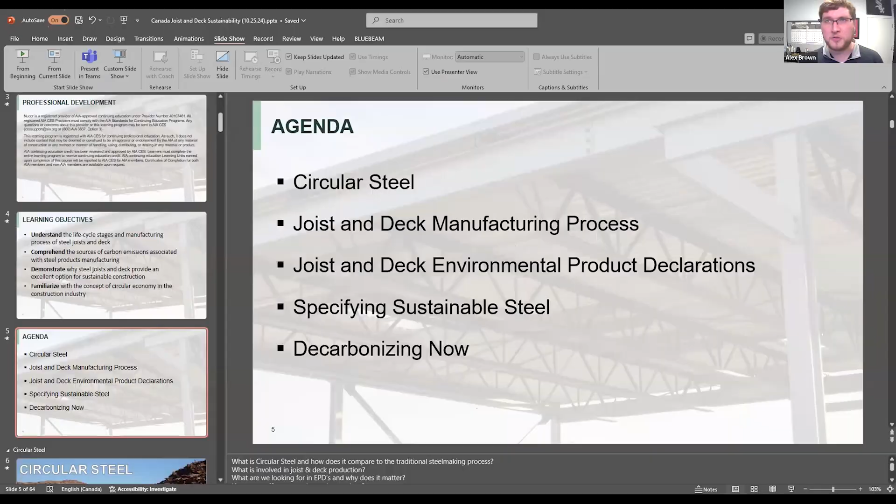Yeah, thank you so much. So myself and Alex, we are both from Vulcraft. I am Sherard Gosine, I'm the district sales manager for Vulcraft Canada, and I'm located in Calgary. I'm also Vulcraft Canada West's product champion for sustainability for our Western division.

Yep, and I'm Alex Brown. I'm actually stateside, I live in the Chicago area, so at the risk of being told to leave, go Blackhawks.

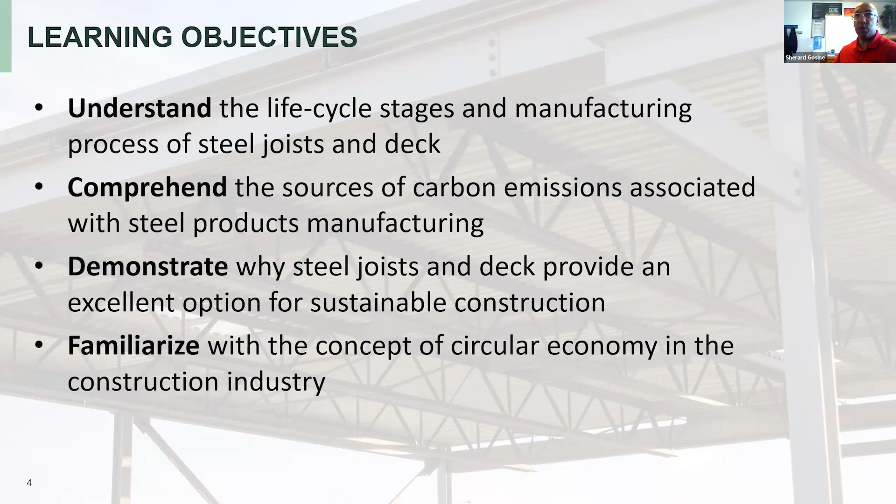Great, thank you Alex, so let's dive right in. Today we want to understand the life cycle and stages regarding joist and deck, comprehend the sources of carbon emissions associated with that, demonstrate why steel joists and deck provide an excellent option for your sustainability needs, and be familiar with the concept of a circular economy in regards to construction.

So with circular steel, that's what we'll cover first, followed by an overview of the joist and deck manufacturing process, then our EPDs, or environmental product declarations, how you can specify sustainable steel, and then also decarbonizing now for your project needs.

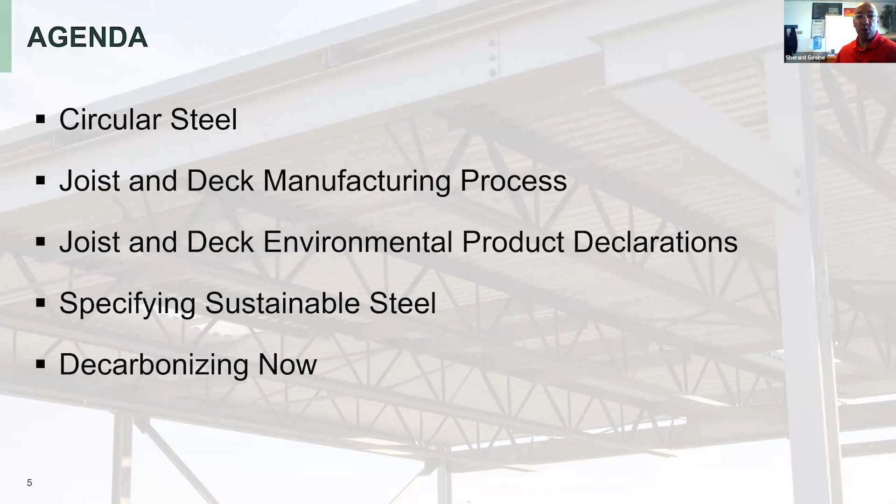So circular steel, what is it? Well, involved in circular steel, what we're specifically talking about is your carbon. So operational carbon examples are something like the electricity used to turn on your lights, natural gas for your heaters, water usage, and the carbon emitting ways those utilities are generated. Operational carbon is just a piece of the overall carbon pie.

But in order to try and bring down that carbon footprint, it's been expanded to include everything from cradle to grave, basically. Some examples of embodied carbon would be the emissions from the mining of raw materials, electricity used to run the machines to process them. So that's that entire pie I was talking about. And measuring operational carbon in LEED calculations is a good start, but we can do better, which is why there's an expansion to include embodied carbon as well as operational carbon.

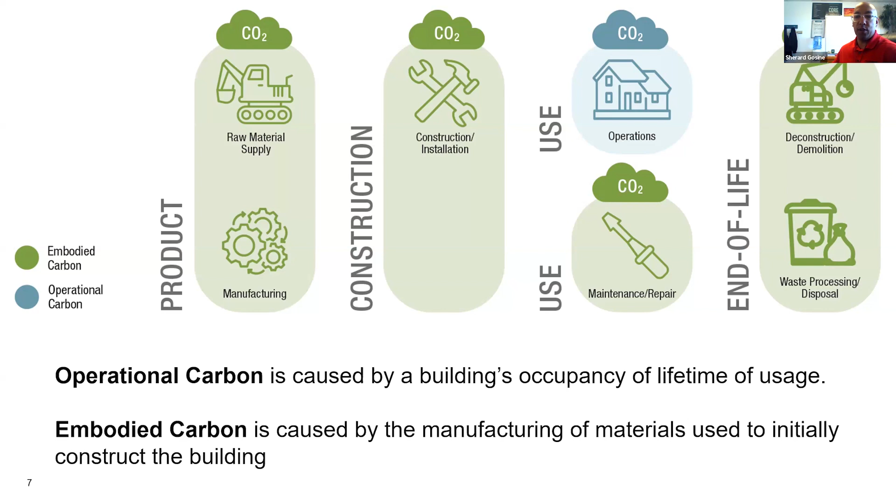So greenhouse gas emissions - the majority of greenhouse gas emissions stem from the steelmaking process, like 90 to 92% of greenhouse gas emissions comes from that first step.

Where steel comes from really matters. The predominant production method internationally is the use of blast furnace or basic oxygen furnace, which is kind of your quote unquote old school method of creating steel. However, when you come stateside, the construction products sourced from US manufacturers are more environmentally friendly than those sourced offshore.

The construction industry generates an estimated 39% of the world's carbon emissions, according to the World Green Building Council. North America has the most advanced green building market, with commercial and government sectors alike continuing to drive the uptake of sustainable building best practices.

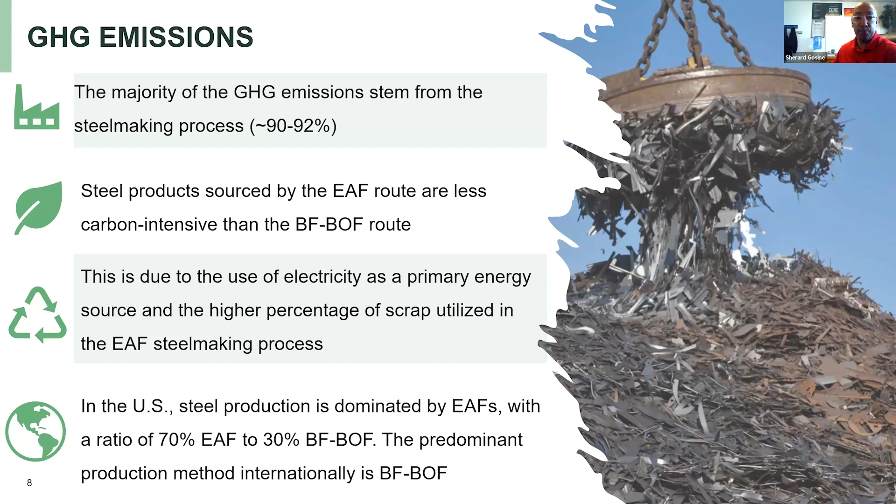So what are the two processes used for steelmaking? One is extractive, the other is circular. When looking at extractive steelmaking, it's really the mining and the blast furnace technology that are really carbon intensive. When you compare that to the circular steelmaking process, it can and does use the end of life steel from the extractive process, thereby reducing the embodied carbon content.

In the circular steelmaking process, you'll take your end of life steel, it gets processed, it gets melted down in an electric arc furnace, and then gets used. Once that project or use is done, the cycle starts all over again, so you're not digging up any new material, new iron ore for your steel. The great thing about steel, if you didn't already know, is it can be recycled and reused infinitely without a loss of mechanical properties.

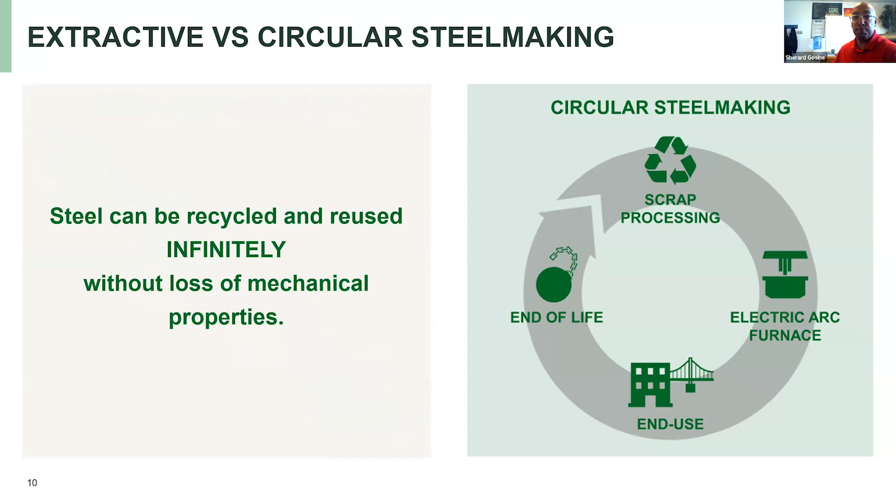So comparing the steel making process between blast furnace and electric arc furnace, much of the greenhouse gas emissions associated with steel stem from the production of liquid steel. Two main types of technology are used: the integrated mill and the scrap-based mini mill. In an integrated mill, liquid steel is produced through an integrated blast furnace and a basic oxygen furnace. The main source of CO2 emissions there stems from iron production, which involves burning iron ore and coking coal.

A second method to produce liquid steel is through electric arc furnaces, otherwise known as mini mills. Mini mills use steel scrap for the most part. In that EAF steel making process, most of the CO2 emissions are associated with electricity usage, whether that comes from hydro, coal, nuclear, or whatever source.

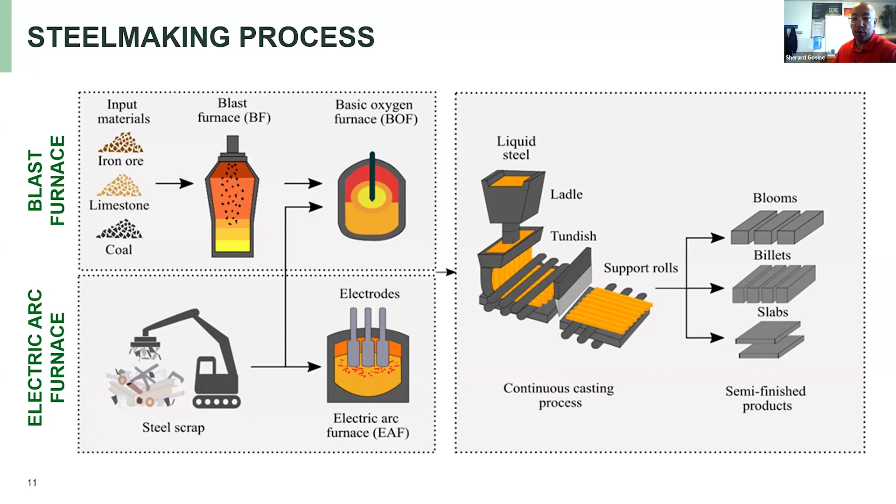Once that liquid steel is produced by the blast furnace, oxygen furnace, or electric arc furnace, the process of forming the steel products is essentially the same. The liquid steel is poured into a ladle, stirred, then poured into a caster to achieve the desired semi-finished shape. After that, steel is cooled, reheated, and shaped into various products at the rolling mill. For joists, mainly long products are used, and for steel deck, coils are used.

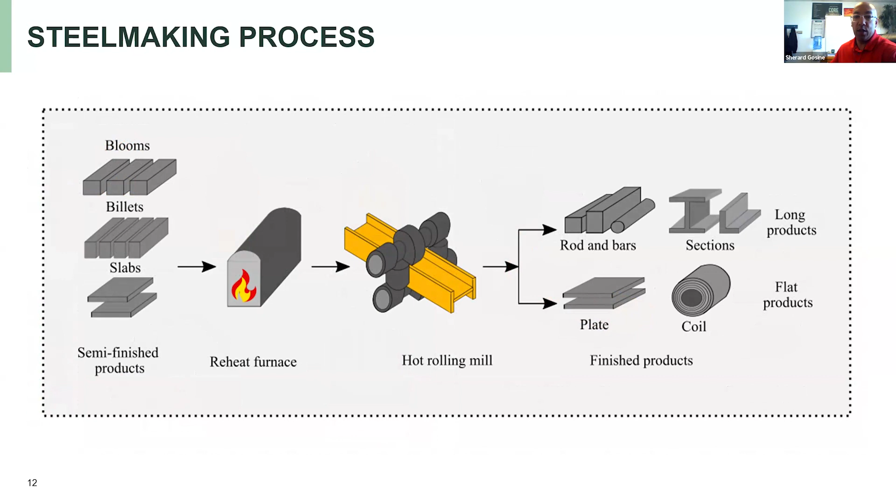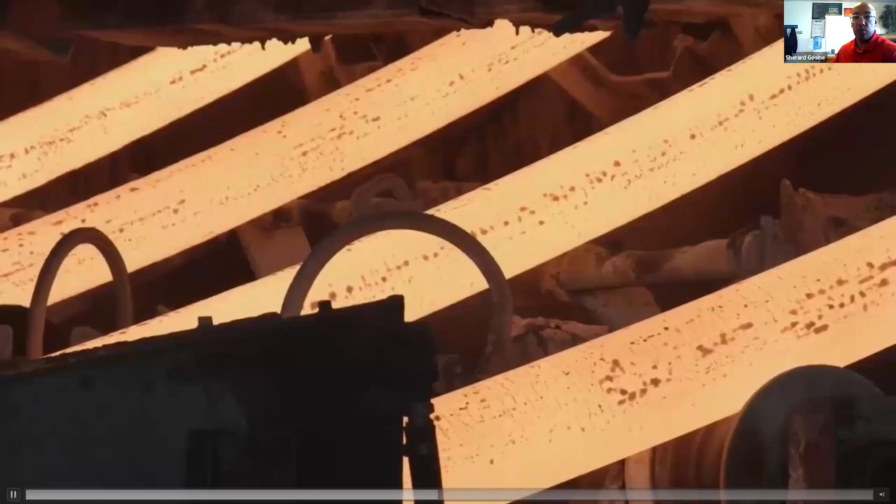Once sorted, our cranes drop the scrap into our EAF furnaces, which are the driving force behind our steelmaking process. The EAF uses electricity to melt the scrap down to 3,000 degree Fahrenheit molten steel. This process is significantly more energy efficient than traditional steel furnaces. These strands, usually called billets, slabs, or blooms, are trimmed in preparation for rolling. To reduce a steel slab into a final product requires pressure, a lot of it. Once finished, our steel products are packaged and shipped via barge, rail, and truck to customers across North America.

So what are we looking at in terms of recycled content? When it comes to joists, the recycled content in that electric arc furnace technology is about 97%, so really high. Deck is a little bit less at 60%. Our products across the board for joist and deck average about 77% recycled content.

Just something to note, the blast furnace technology does produce slightly cleaner steel for coils, which affects its usage for light gauge applications such as the automotive industry. So industries like that would lean towards blast furnace technology.

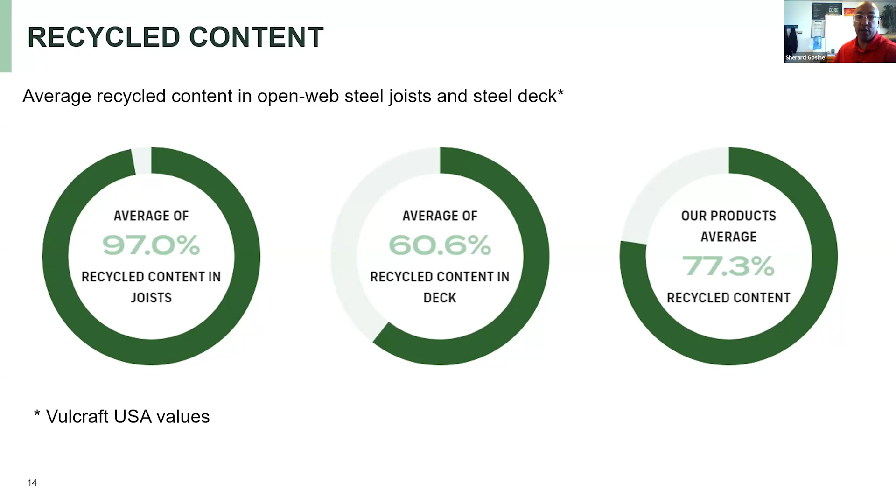At this point, I'll flip it over to Alex, and he'll run over the manufacturing portion. Before getting into this, there was a comment made by Forrest, and thank you, you're spot on, that North American steel, you can't generalize to say it's better or worse than anywhere else internationally. It really comes down to whether it's a blast furnace or an electric arc furnace operation. It happens that in North America, most major manufacturers are using electric arc furnaces, but that's not a given. In the back half of this presentation, when we get into the environmental product declarations, that's going to come into play on how you can tell where that steel is coming from and what that means.

Let me switch to my screen here, which should be the exact same slide you were seeing before. But then this one's different.

So once that raw steel is made, whether it's a coil, as we saw in the video, or an angle or round or bar, on the Vulcraft side, we're going to take those materials and turn it into joist and decking.

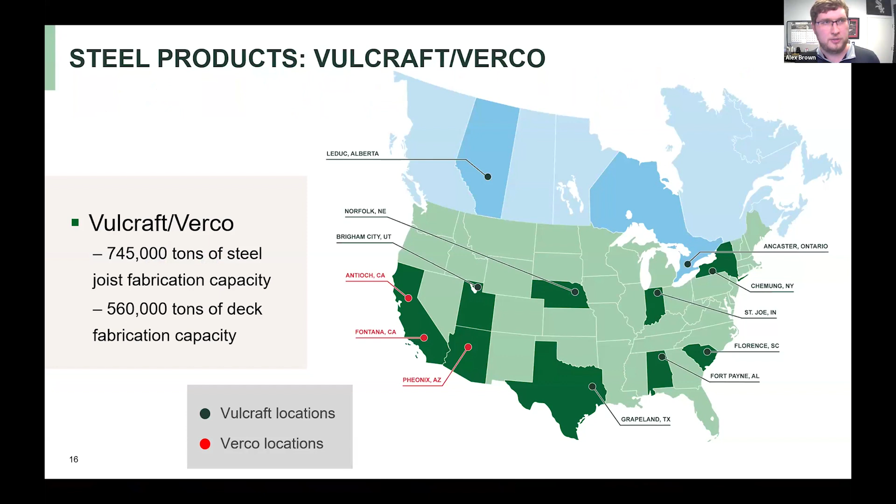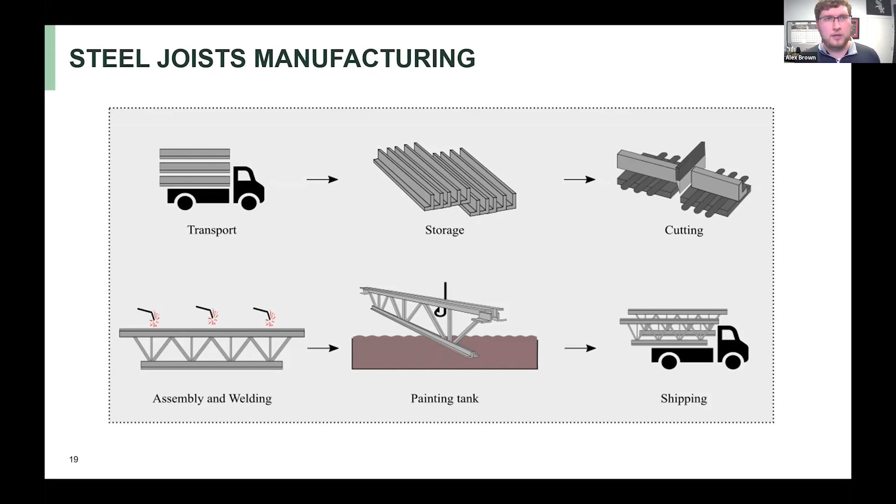And it follows its own process as well: transporting the raw materials, accepting them on site, storing them, cutting everything, doing the prep work, then doing that assembly and welding, dipping it into a primer, and shipping it to the job site ultimately. So we'll go through all of those here in a little more detail.

So you can see some of that storage here, just from an engineering perspective. To make any kind of a truss shape, we're able to control each individual member size, so we can optimize that to make it the lowest weight possible as an efficient design. We've got to stock a lot of different material sizes in order to have that flexibility, so you can see all of that stored here, just stacks and stacks of angle.

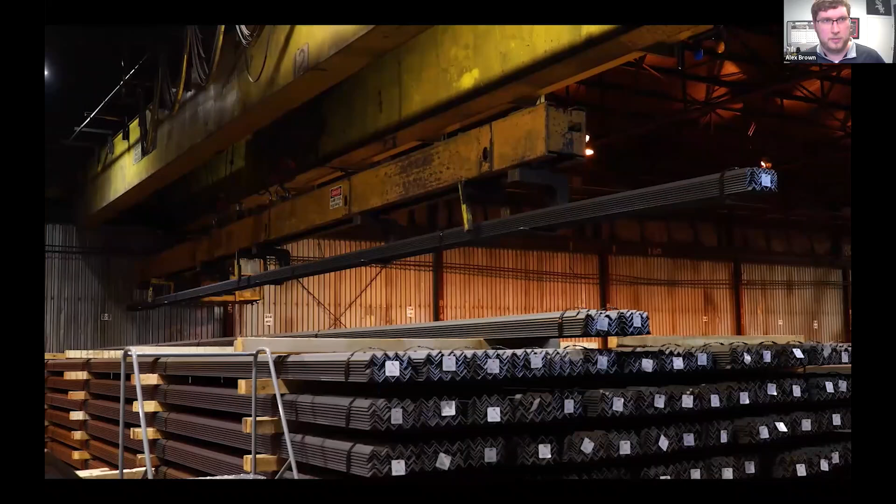This particular video was taken at our Nebraska facility in America. It doesn't look exactly the same, but it's the same procedure of handling that material, moving it, prepping it, staging it.

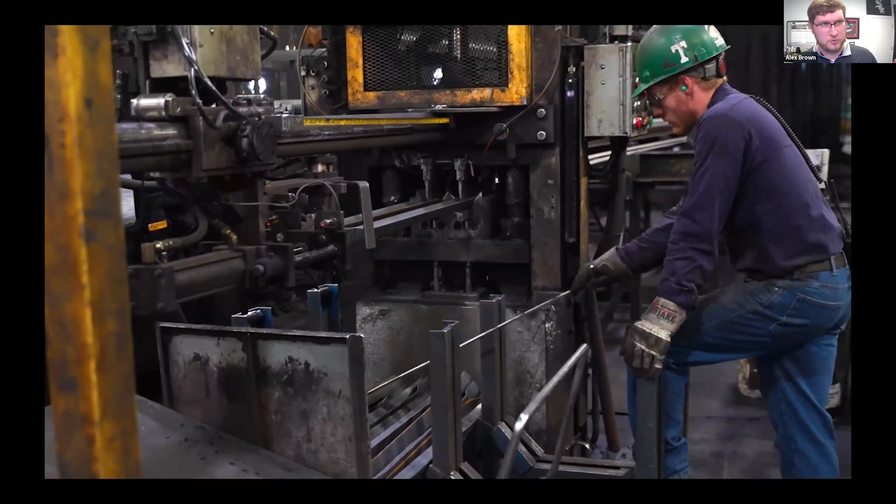You can see they're dropping the angle into place. The first guy here is splicing two angles together to get what we call a chord, so the top or bottom members of the joist. Then those are the webs, cut to length, crimped so they'll fit inside of the chords, and everything is staged ahead of time for our rigging crew.

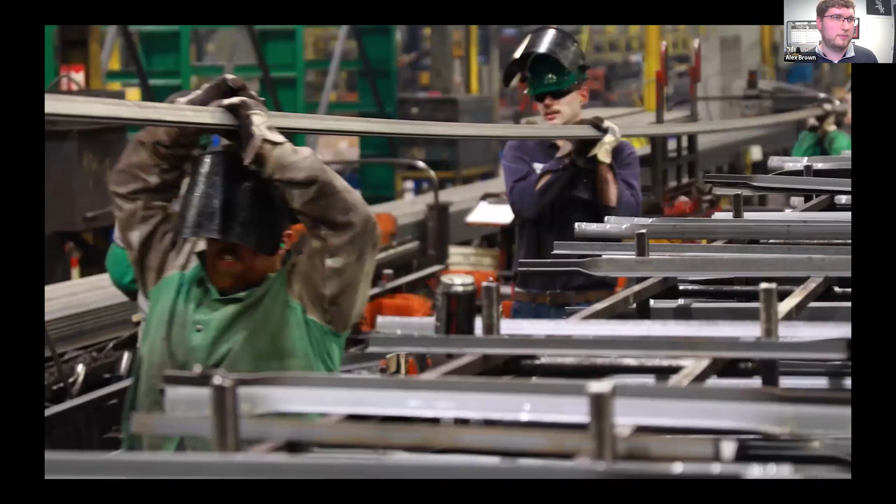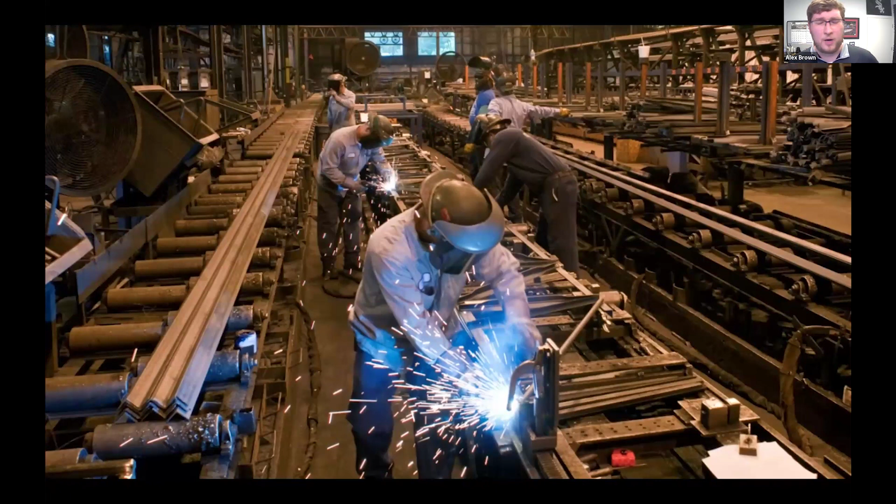You can see him preparing everything, pulling everything into place. Then everything gets tack welded together and clamped together at this part of the procedure.

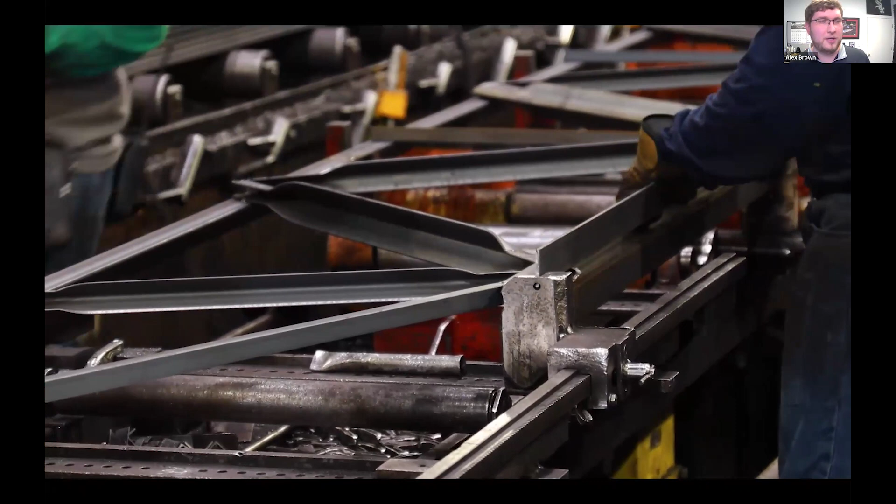Because everything's cut to length, they can just fit it in, and they know where the ends of those webs need to be, since it's got to fit up correctly. Some of our facilities have lasers that shoot down from the ceiling to help with placement. Here he's putting in one of the chord angles, and they're clamping the two of them together.

This process is always really cool to me. Granted, I'm biased because I've gotten to live and breathe this stuff for a long time, but it's just so neat to see all these separate pieces fly together, and in 30 seconds you've got an assembled joist rolling down the line.

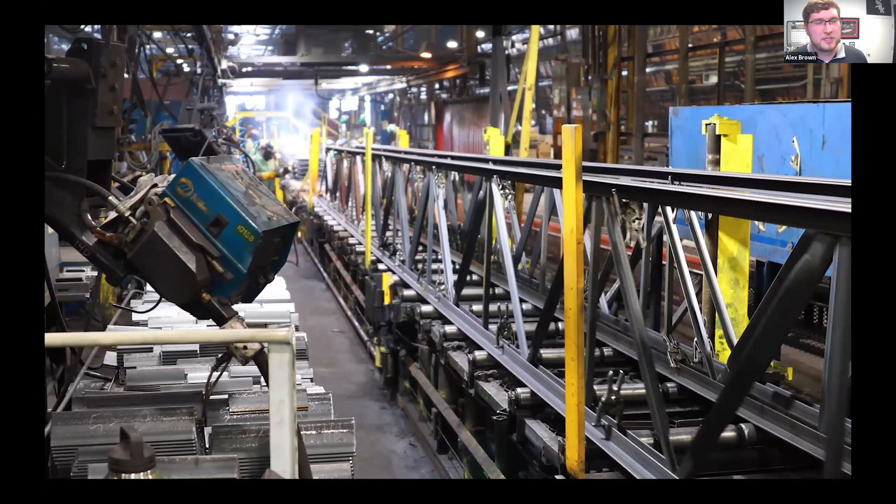In the distance there, that's our welding pit. All of these joists are kind of loosely assembled. They're really not capable of any structural performance, but the weld is what's going to pull it all together so that you get that truss action.

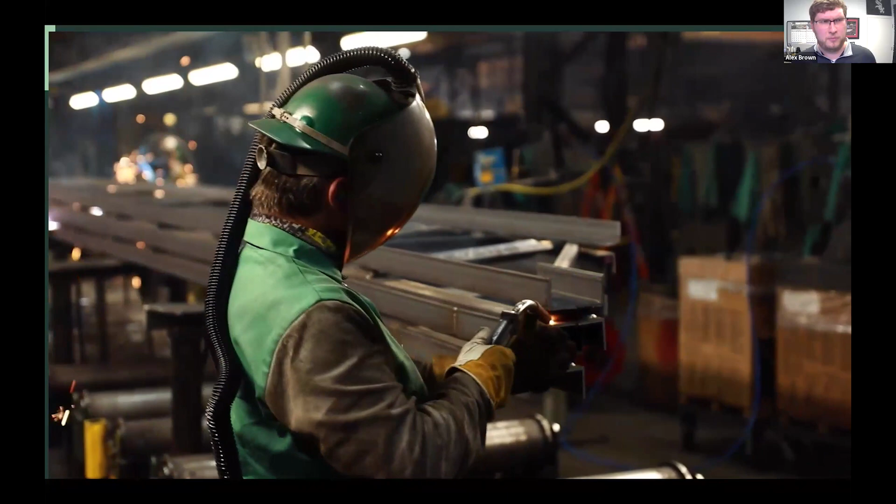You notice there's a couple of them stacked up in this shot. I think some of the other shots have three of them on their sides. That's because we get that repetition of putting so long of a weld at such a thickness, one after the other.

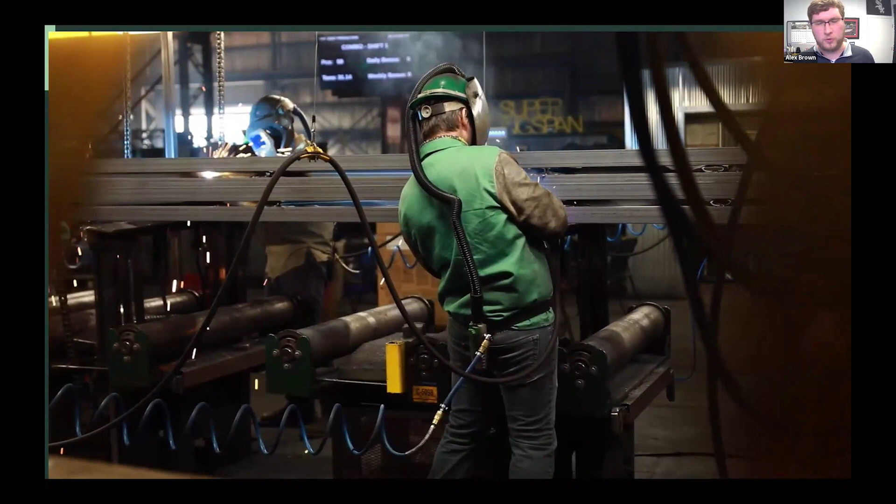So you can see here, they're flipping the joist over so that none of our welds are upward or overhead. Everything is pointed down so we can apply it easier and get a more consistent welding performance.

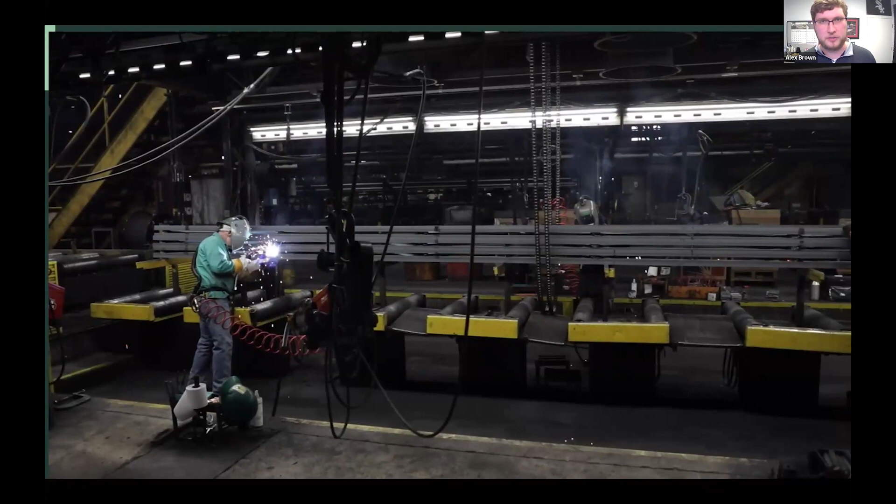Every joist we manufacture has a specific location on a specific project. It's not like we build stock joists in 50-foot lengths that you cut down to what you need. Because of all the intricacies of building a truss and having all that load transfer the way we intend it to, we build them all custom length, custom loading depth for the specific job conditions.

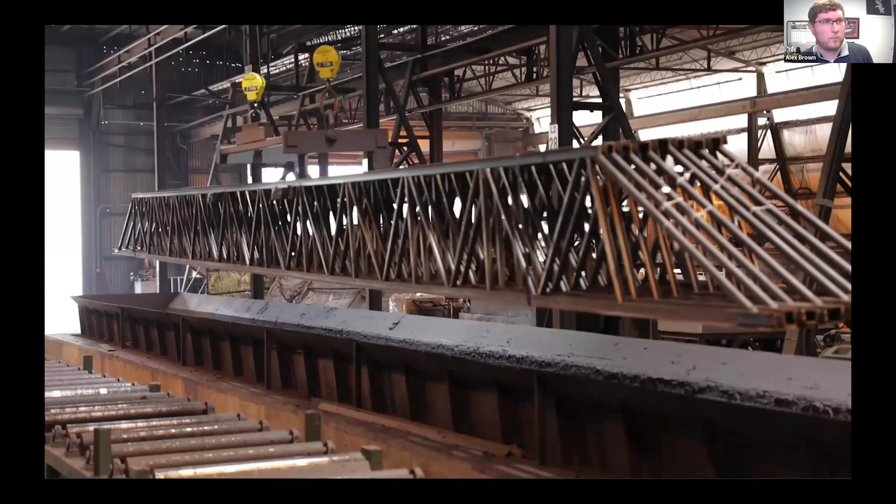Then after everything's put together, we'll dip it in gray primer. Gray is the only color we offer—kind of the old Ford Model T attitude, you can have any color you want as long as it's black. But it's just a primer, compatible with most finish paints, and intended to minimize whatever rusting may want to occur on that bare steel. It's not going to prevent it completely.

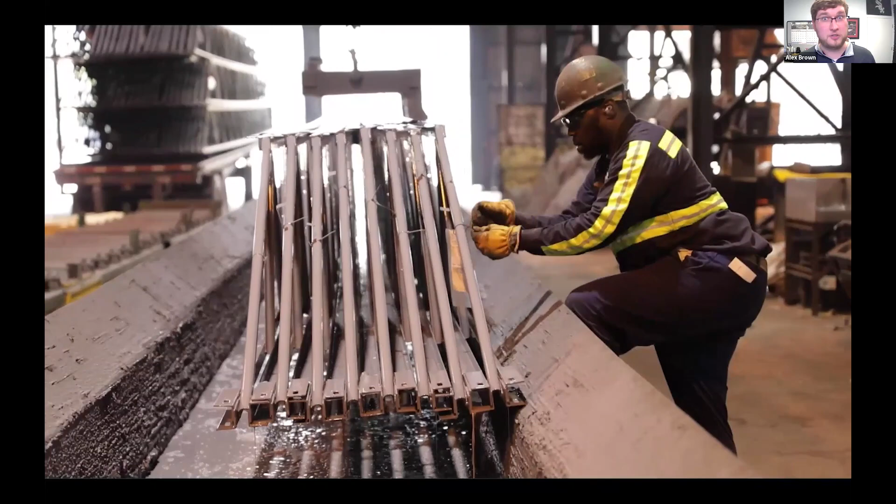Up north, I hear you get snow. I certainly do here in Chicago, and I've seen joists just get buried under a pile of snow for the whole winter. So it's not going to hold up to that kind of an ask. But just going down the truck, getting to the site, making sure it's properly covered, it should hold up pretty well there. You can see some bullet points laying it out.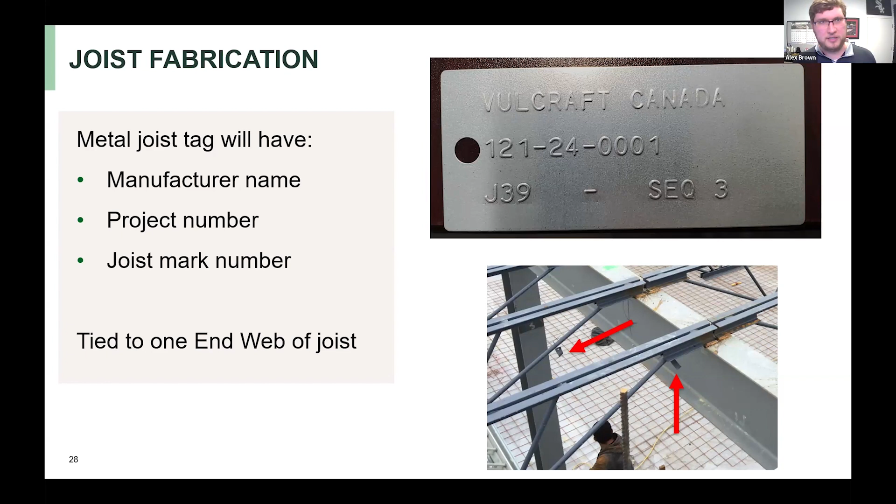So after all of that's done, after the paint dries a little bit, we'll load it up onto our trucks and maneuver them around the yard. We've got really good loading crews to manage this because it can be quite a bit when we're busy, maintaining all of these joists and all of the deck, making sure we know what belongs to what job so we can load the trucks when the job requires delivery.

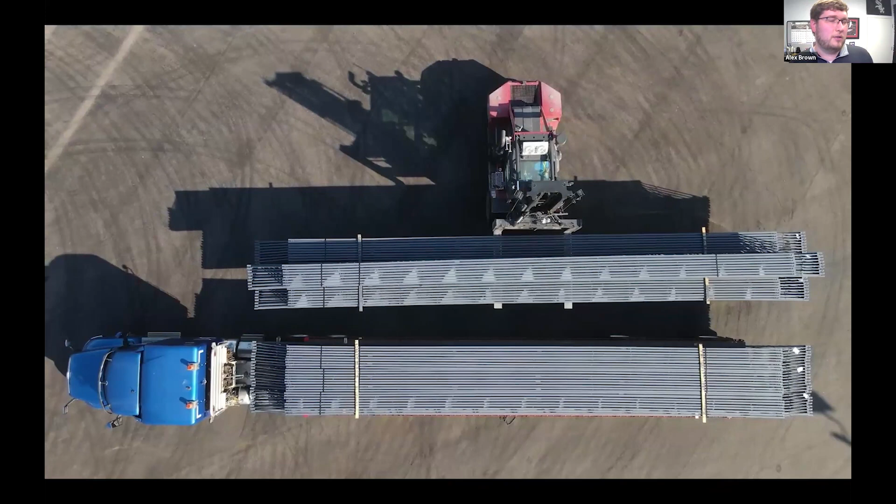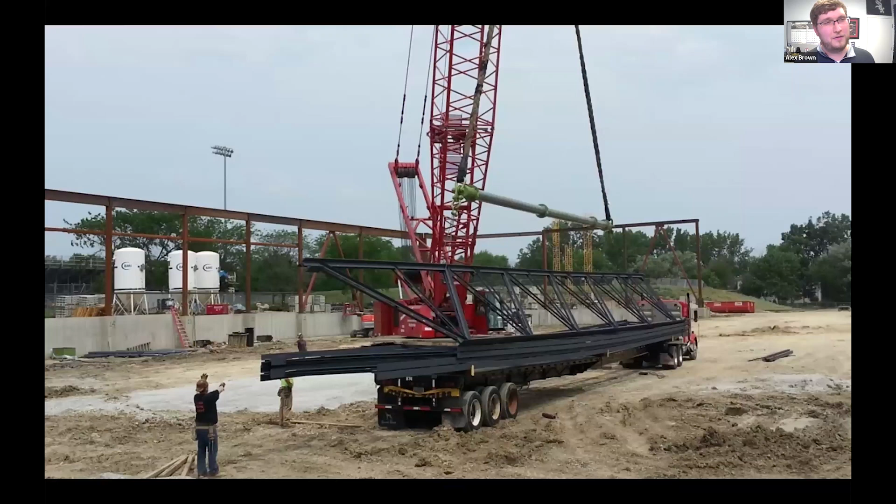So then everything gets secured on the truck. It's strapped down and then sent out to wherever the project location is, at which point the erector is going to take over and unload that truck, stage it on the ground, and prepare to fly it up into the air to place it where it belongs.

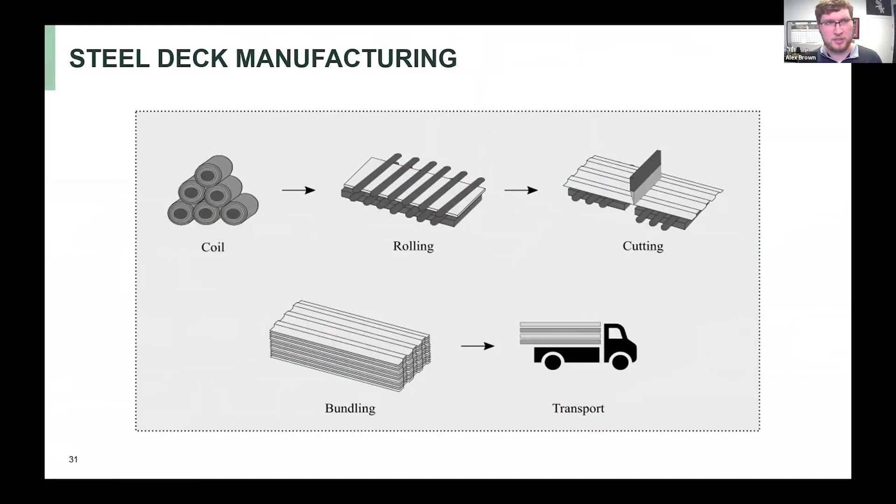On the deck side, it follows a similar structure where you've got your raw material, you have to prep it, you've got to cut it, and then in this case, stack all of those sheets, bundle them, and then again transport it to the site.

So those come with coils, and you can see a lot of coils here. Again, for the different types of deck that we can supply, the different gauge thicknesses that can happen - 20 gauge, 22, 18, 16 - all of that requires separate coils at different widths, different finishes, to make sure we can accommodate everything that we offer.

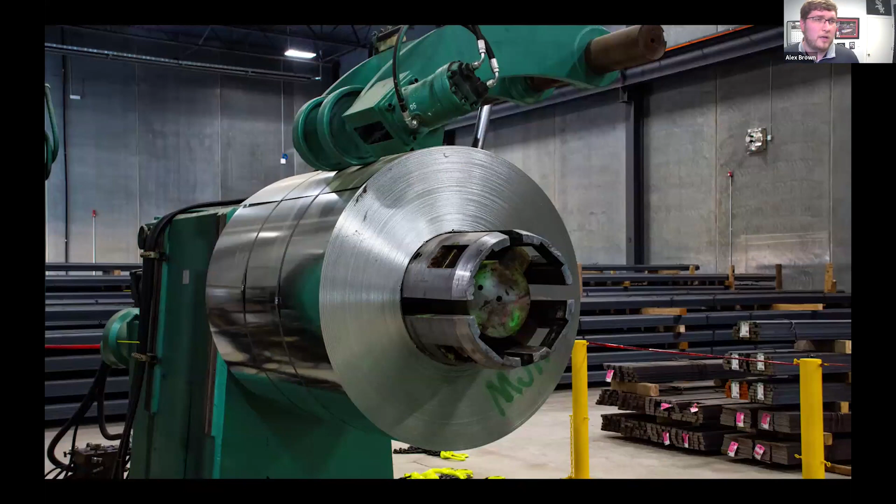And then that first step in the process is taking that coil, putting it onto that arm so that we can unspool it and feed it into our system.

So you can see here just the variety and the quantity of coils that we have just to keep our operation going. Each one of those coils is generally about 20 tons, 40,000 pounds worth of material.

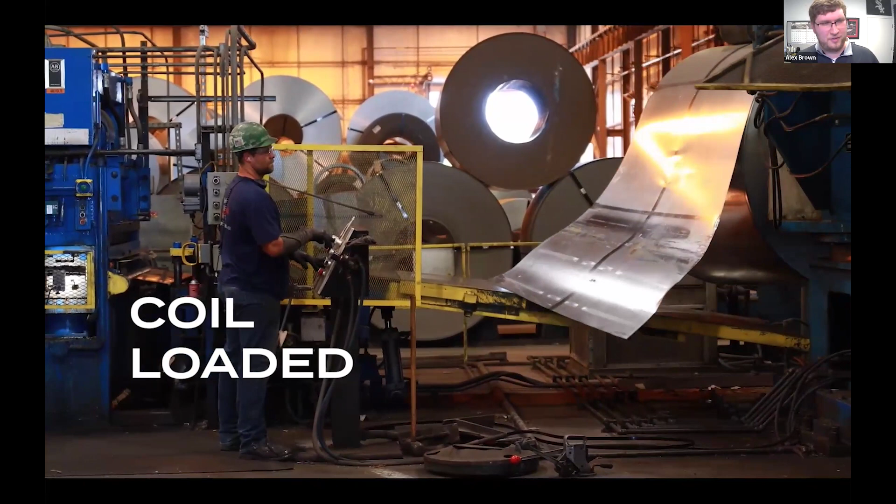So you can see it loaded onto the arm and then having that loose sheet ready so that we can attach it to the previous sheet and feed it into our machine.

Some of our Vulcraft facilities will have inline painting. Our Leduc facility doesn't do this. If painted deck is required, they're able to get it from one of our other facilities and have it shipped over.

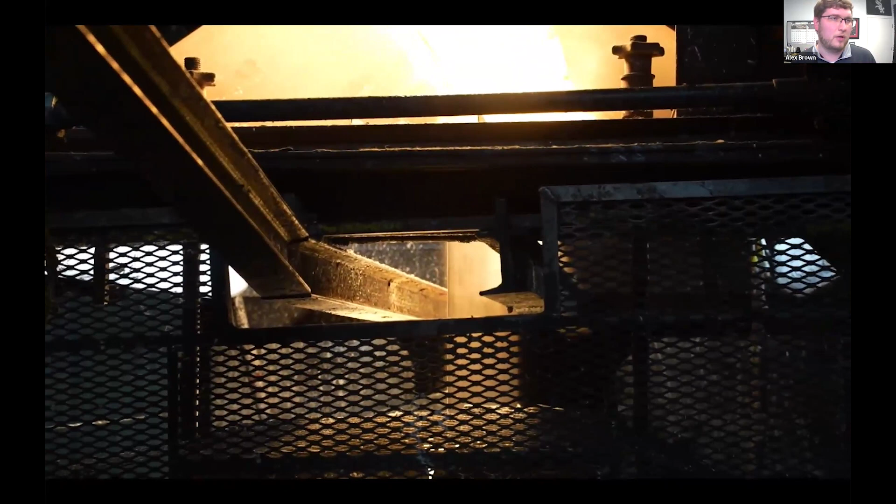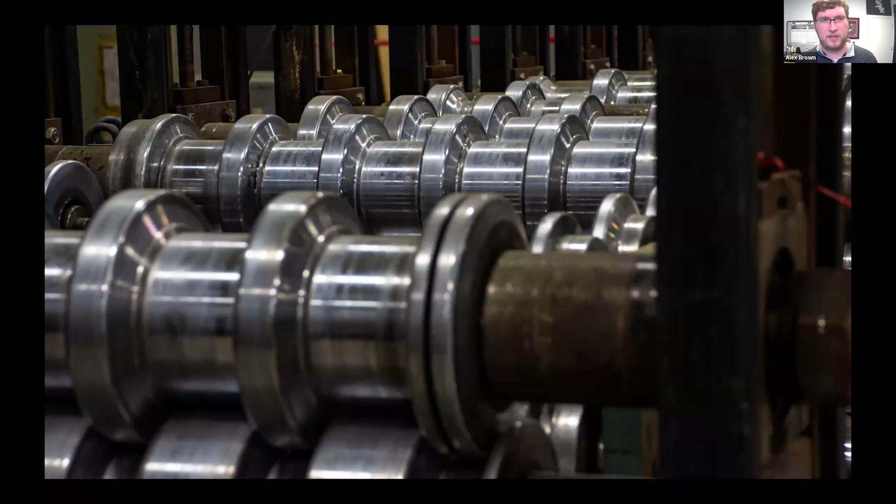And then after it's prepped, sometimes we'll do different chemical treatments or whatever is needed for the finish that's required on that project. Then it gets fed into our rollers. So this is physically taking that flat sheet and starting to bend it and move it to the corrugated shape that's needed for that structural deck profile.

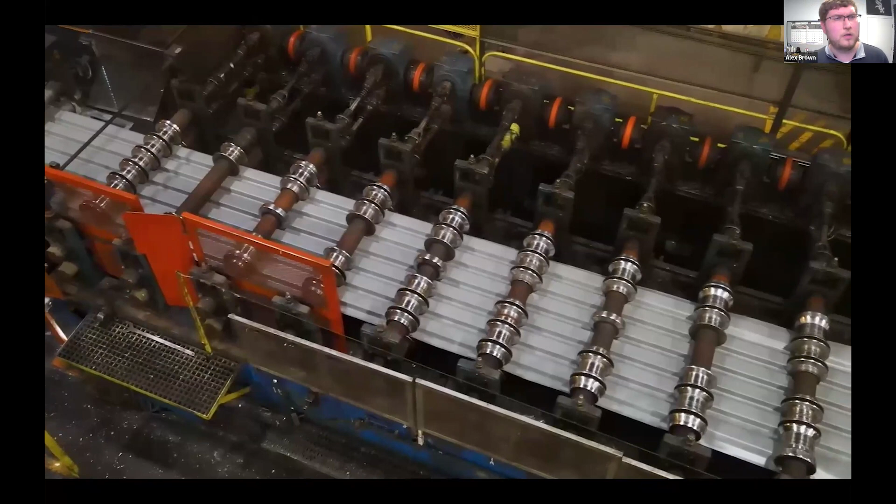So you can see here it being put through those rollers. Different embossments are put in depending on what's required.

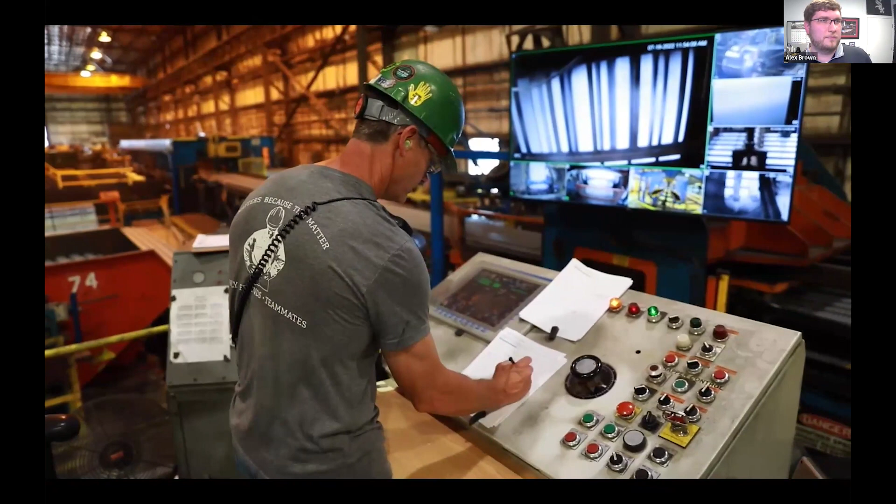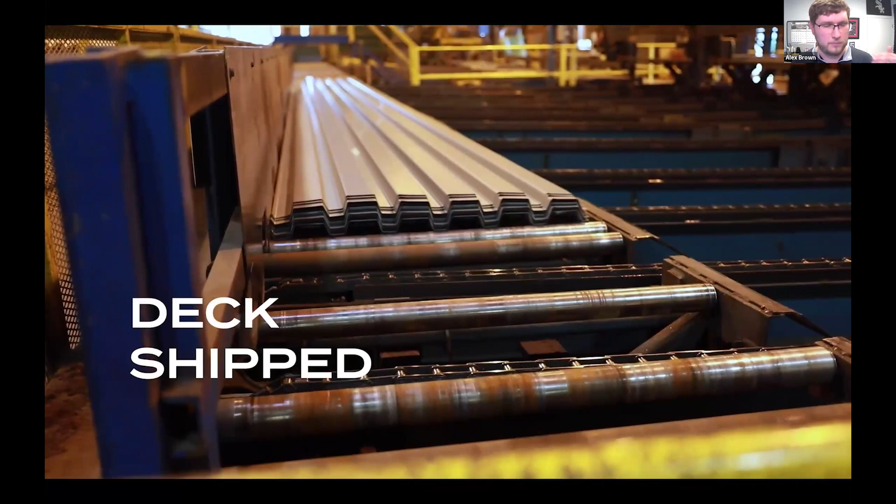And then right here, that's the shear, so that's actually cutting the deck to length. One thing you may notice is there's a lot fewer people on our deck line compared to our joist line. That's just what we found over time - the deck process can be mostly automated because it's really just cranking out that same product at whatever length is needed. Where on the joist side, there's so much variation from one joist to another potentially that we need those human beings to place everything.

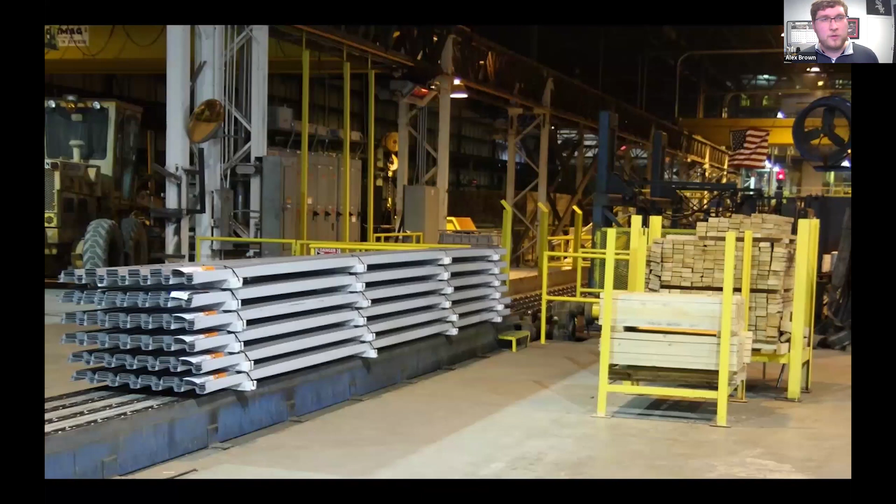And then as the deck comes out, it's going to get stacked, bundled and stored, as you can kind of see here, and you saw a little bit at the end of the video. At which point, similar to joist, it would be put on a truck and sent out.

So with all of this, we spent a fair amount of time talking about what the process is. And I'll hand it back to Sherard for how to measure all of the carbon that occurs throughout everything you saw the last 15 minutes.

I just got to jump to that EPD slide. Bear with me. Yeah, we're used to Teams here in Vulcraft, so we had to remind ourselves how to work Zoom this morning as we prepared for this.

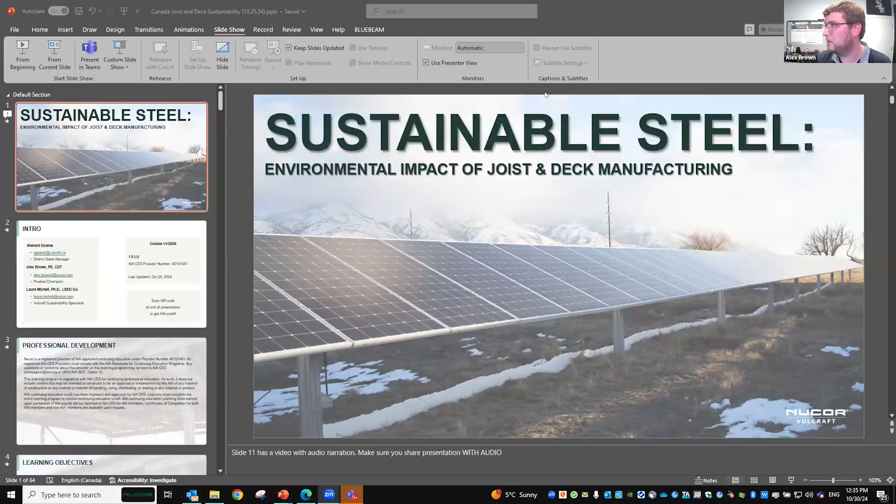It looks like it was asking me to choose to view your screen, Gerard, like it was side-by-side options and things like that, so I'll stop sharing. There we go, there we go, thank you. Perfect.

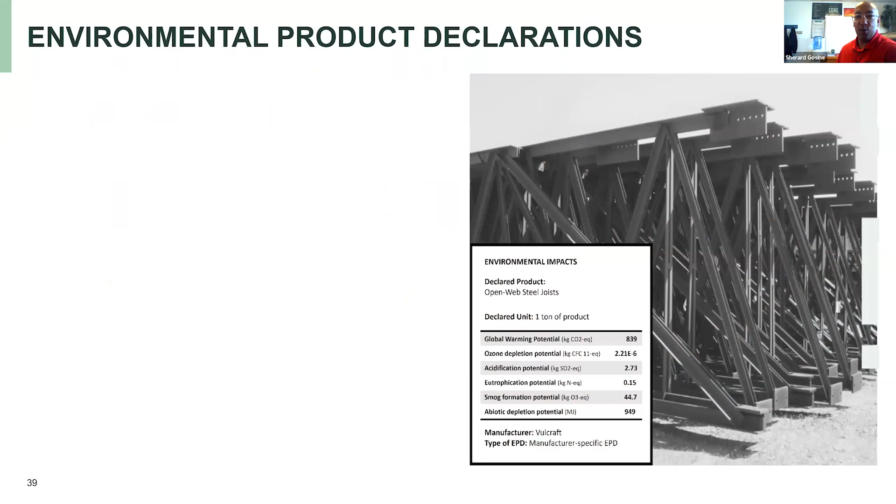Okay, so the good stuff, the environmental product declarations for joist and deck. So an EPD, what is it? Environmental product declaration - these are basically the nutrition labels that summarize the environmental impact of a specific material or product.

Vertically integrated joist and deck companies are excellent at managing their supply of sustainable steel, and we see this through the life cycle assessment in a project.

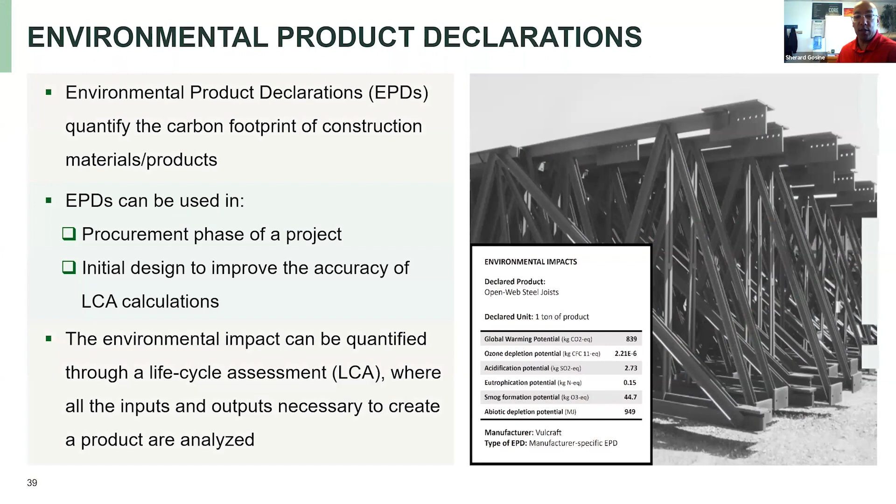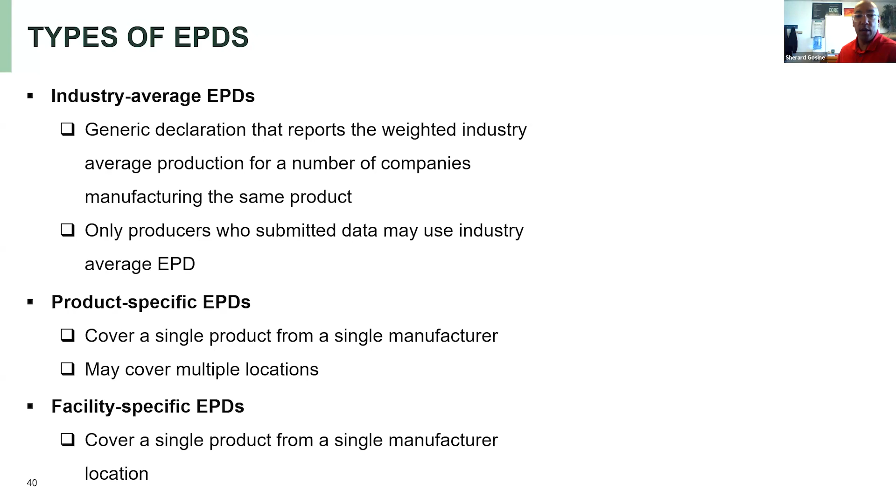So there are three types of EPDs. One is industry average, which is more or less a starting point. It's nice to have, but it can be funneled down when you go to something like a product specific EPD, which is better than an industry average. We can get even better results when we look at a facility specific EPD. So those are the most accurate numbers you can use to calculate the embodied carbon in your steel joist and deck.

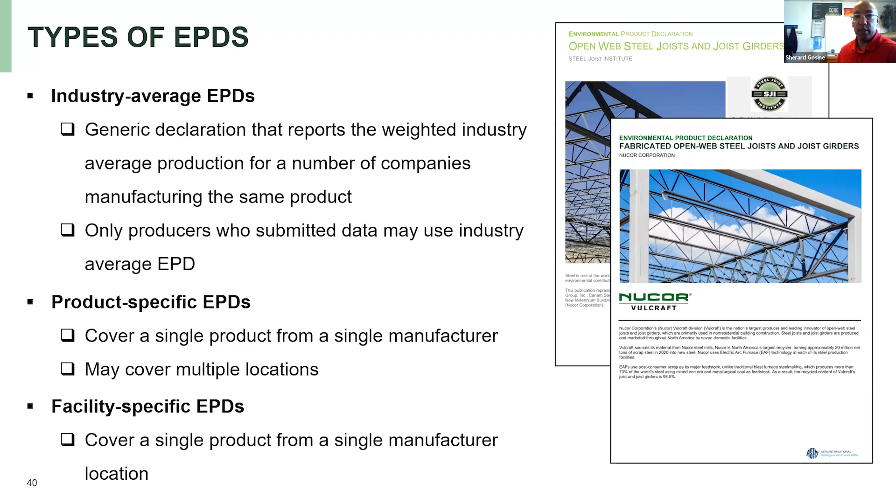So those are the covers that we have for our joist and deck EPDs. We do have links at the end where you can access this information.

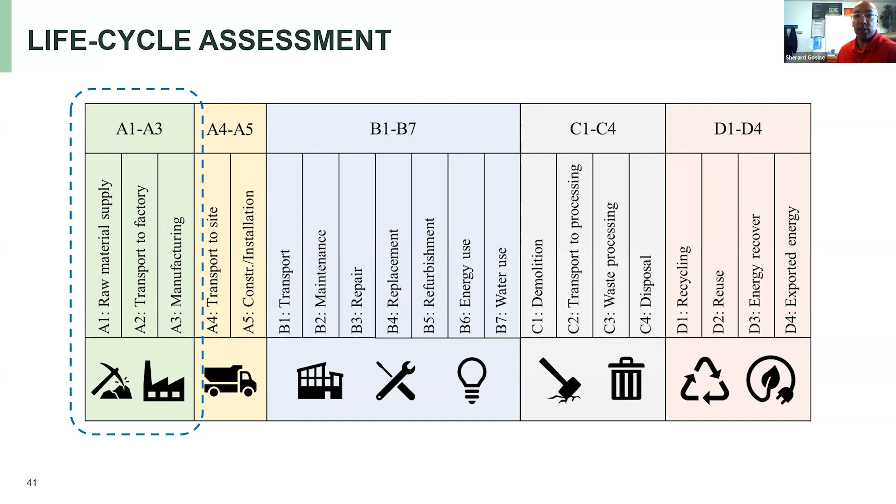So the life cycle assessment of a building, for all intents and purposes, when it comes to joist and deck, we're only concerned with A1, which is the raw material supply, A2, the transport to the factory, and A3, the manufacturing portion, which is cradle to gate.

So when it comes to steel joists, at the top, we see there's that cradle to gate, the A1 to A3 life cycle. And again, that top line is your global warming potential. These are American industry average values from the Steel Joist Institute. That top line, 1.43, which is really 1,430, is the value when you're looking at your global warming potential.

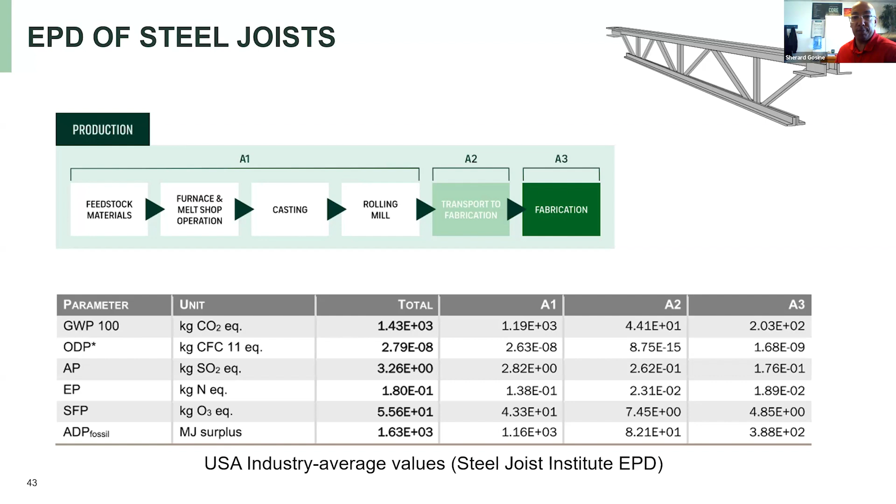Steel deck, also very similar, represented the same way. Those numbers a little bit higher. 2,320 is the value that is also industry average.

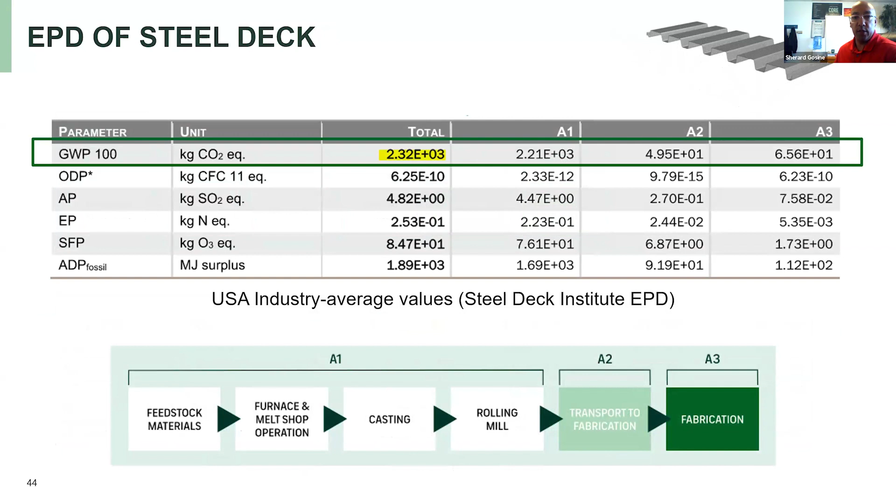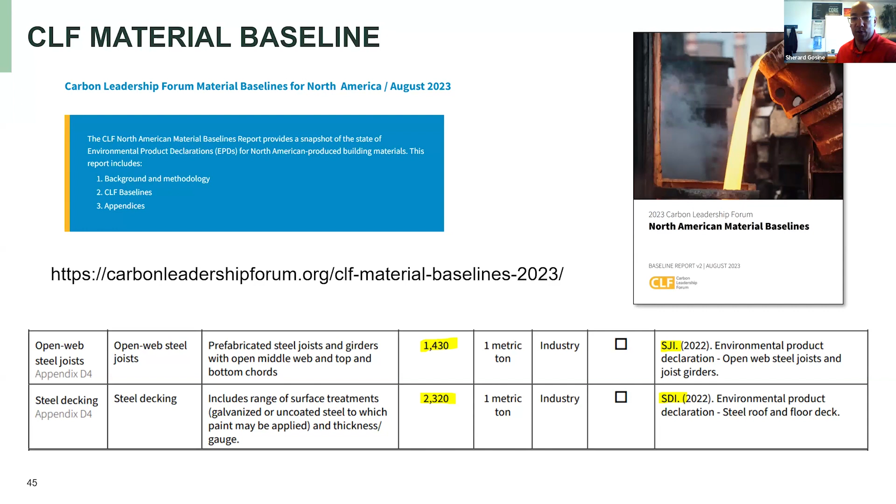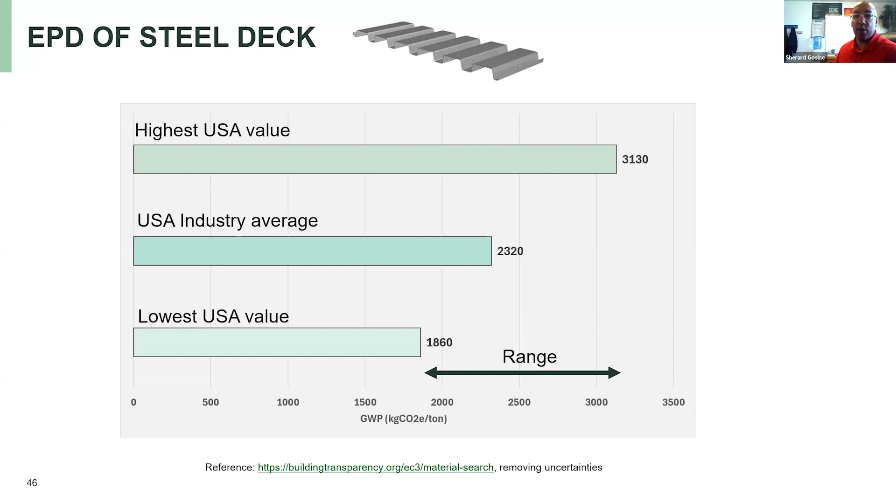When we're looking at EPDs, they can vary quite a bit when you compare who's representing what, whether it could be an industry average or just a company average, but there's a big range there. So it's important to know that just using an industry average won't give you an accurate picture of your specific project.

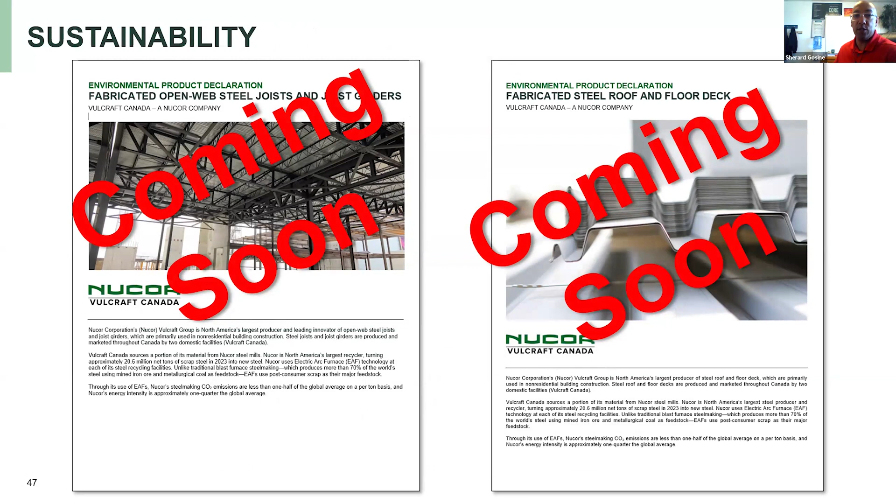And like I said, these are the cover pages for the Canadian ones. They should be ready, I don't know exactly when, but very, very soon. And also good to know that the values in these reports are third-party verified by Trinity Consultants.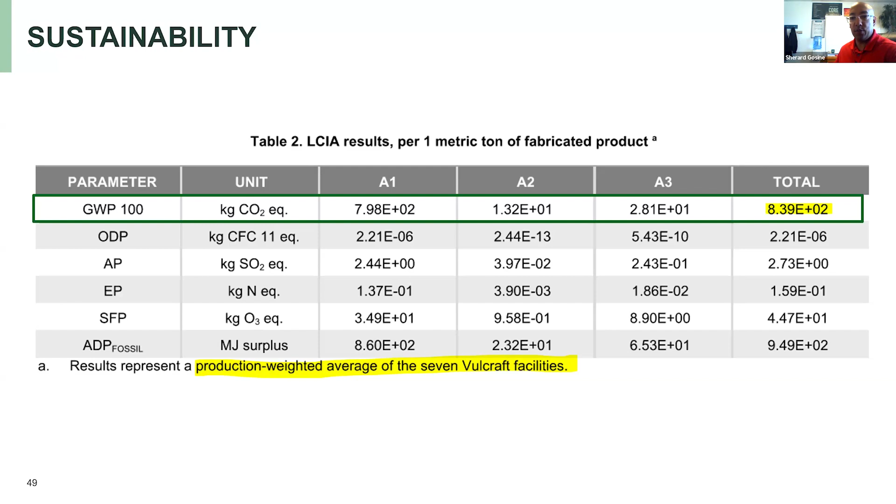So here, this is just the weighted average of the 7 Vulcraft facilities that we just saw on the previous slide. The average values for the Vulcraft joist EPDs are 8.39, or 839, compared to industry average values in the United States of 1,430. So quite a big spread between what's represented in the industry average compared to what's shown in the Vulcraft joist EPDs.

So what to keep in mind when you are designing your projects: if you're looking at something like steel beams, your GWP number could be upwards of 1,220. Compare that with using steel joists in your project, you're down around 839. So that's about a 32% reduction in your embodied carbon per ton. Additionally, you're saving about 20 to maybe 40% in weight savings by selecting open web steel joists over steel beams.

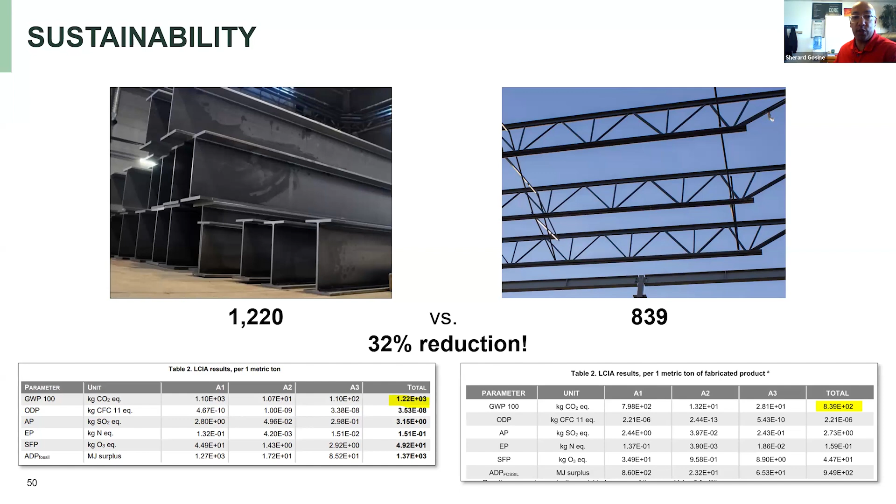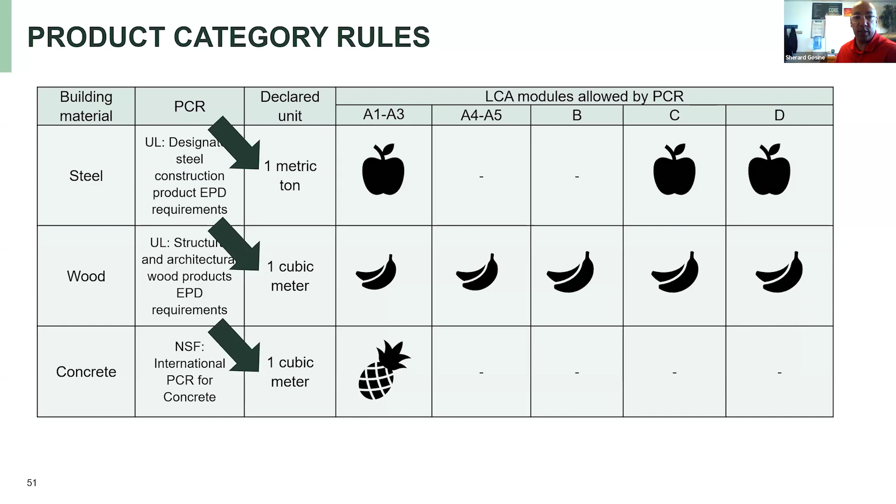Here we just see a comparison of the different product category rules. Steel represented in units of 1 metric ton, wood represented in 1 cubic meter, and same thing for concrete represented in cubic meters. So you got to be careful when comparing values across different building materials. They're not always the same, and there's not always life cycle assessments for each product. Whereas steel you've got 3 of them, wood's got all 5, concrete's got 1. So it's not always an apples to apples comparison.

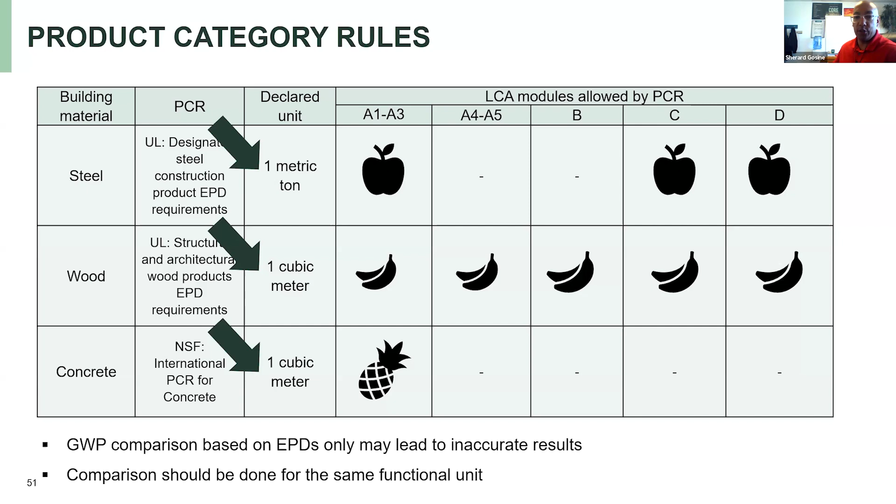When you do compare them, there's some math involved, and you should be comparing them for the same functional unit. It's kind of the same thing here - we want to make sure that when you're comparing them, compare apples to apples. Don't just take the numbers and expect them to tell you the same information. When comparing your construction materials, make sure it's fair across all 3, wood, concrete, and steel. Make sure you're using the same safety codes, life cycle span, use the same strategy, designing for the least amount of material, and express them in the same units.

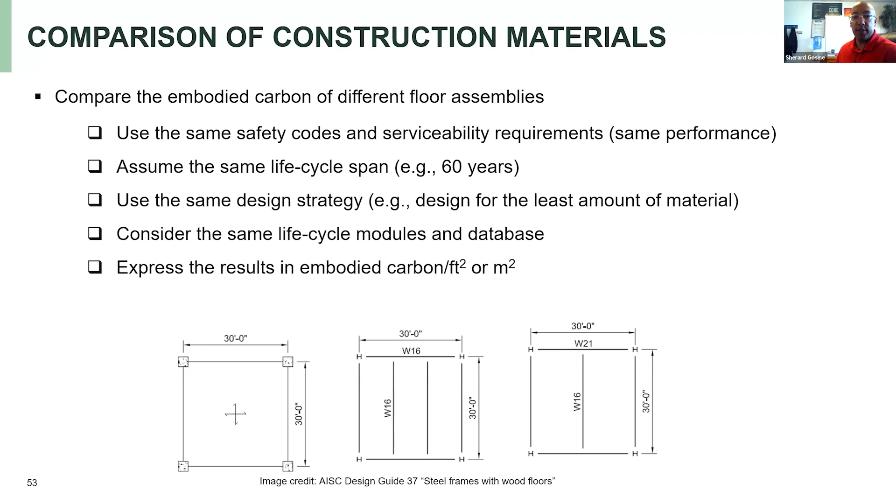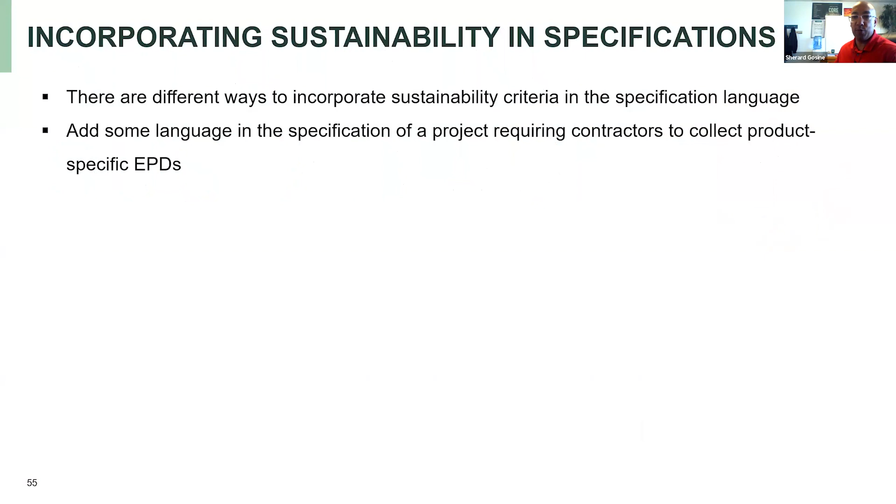So how can you specify sustainable steel in your projects? Well, incorporating sustainability criteria in your specification language could be a way to select the lowest carbon version of a given product and motivate the industry to adopt greener solutions for manufacturing construction products. This example here in green, what you're doing by just following this type of example, you're just asking for the EPDs. The values themselves are not of a big concern to you. You just want to know that the EPDs are available.

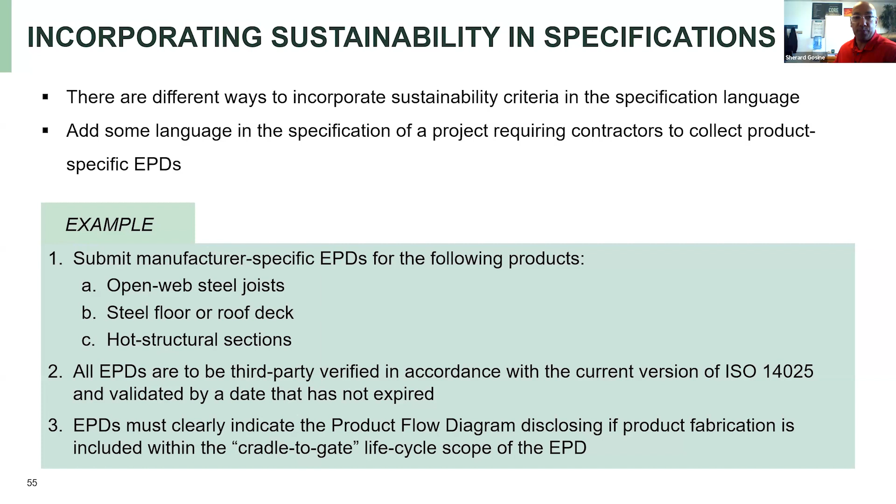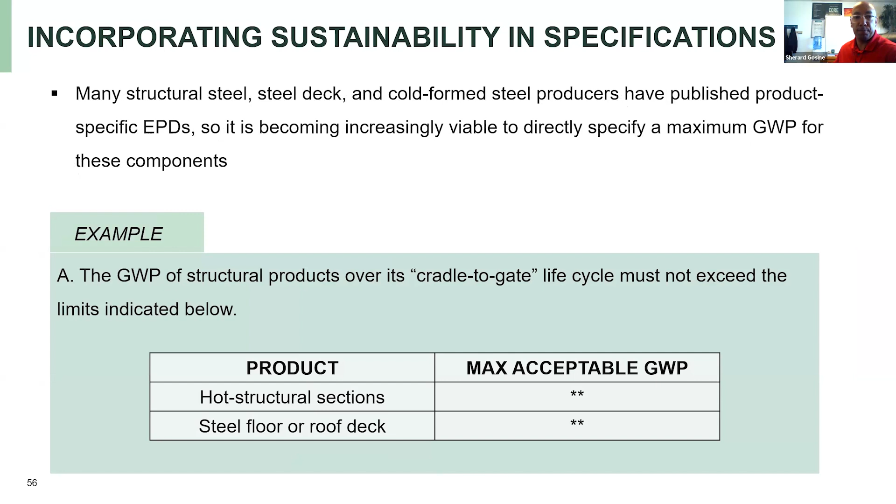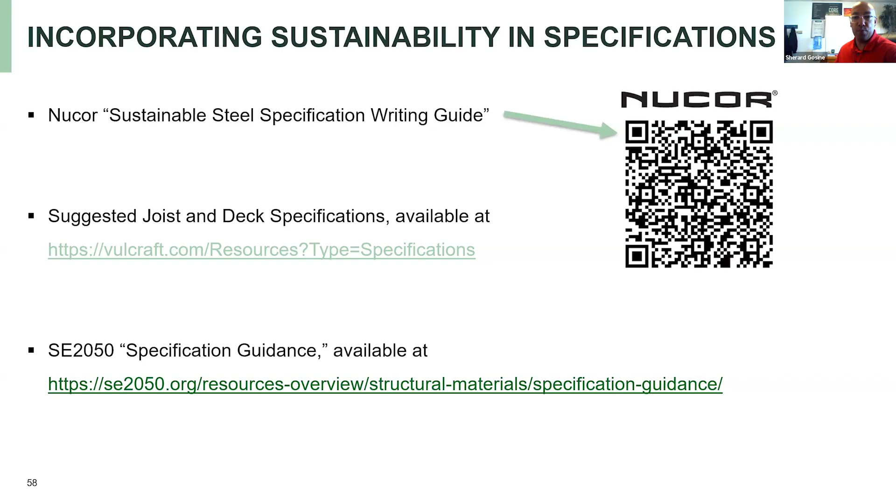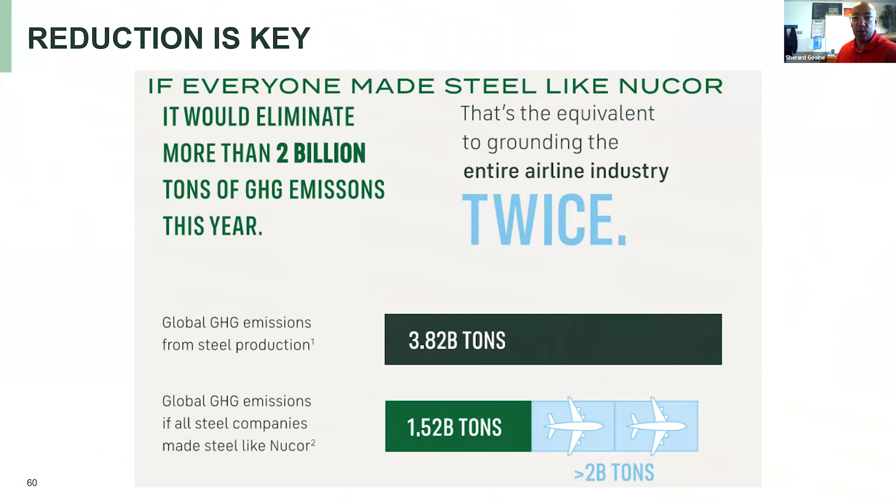So let's get to the end of this because I know everybody's time is important. So reduction is key. If everyone made steel like Nucor, that would be like grounding the entire airline industry twice. So I always thought that one was pretty cool.

Nucor's 2030 carbon reduction strategy: we will continue to reduce the consumption of fossil fuels. We are exploring the use of biocarbon substitutes in place of, to power our electric arc furnaces. We're pursuing a series of projects that will reduce natural gas usage or replace processed gas with low or no carbon technologies. So we're doing our part by aiming to reduce our carbon. You can help by asking for carbon reduced steel on your project.

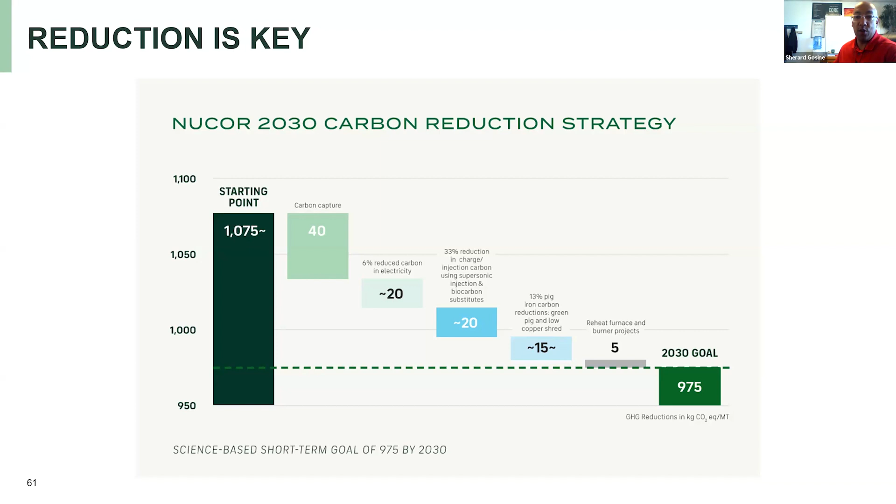Just to sum it all up, what can you do to help? Let's specify some thresholds for global warming potential in your projects. Dictate where your steel is procured, perform those LCAs, and design your project using higher strength materials. A lot of steel makers do offer 50 KSI or 55 KSI steel. There is 80 KSI steel available. You might want to go down that route, get higher strength steel, and then maybe you'll need less steel in your project.